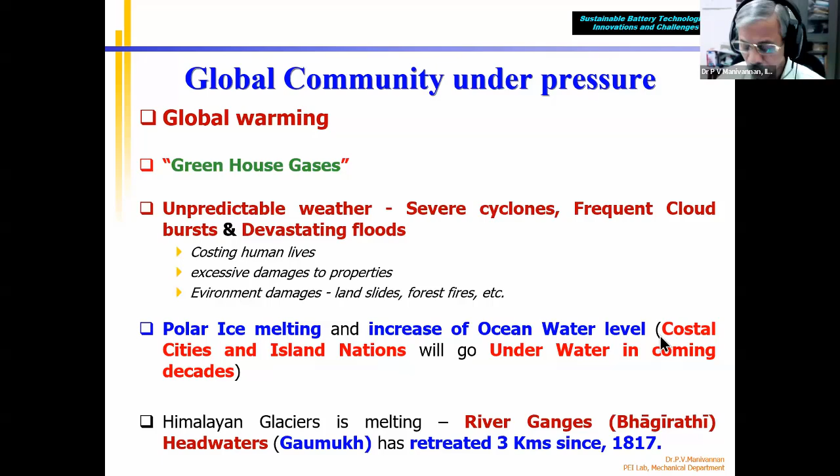That means many coastal cities like New York, Bombay, Chennai, Vizag, Calcutta, Tokyo, big cities around the world, will go under water, because IIT Madras is maybe 5 to 8 meters above sea level, with the Bay of Bengal just 1 to 1.5 kilometers away. So if the Bay of Bengal water level increases 10 or 20 meters because of melting of polar ice, Antarctica, Himalayan and Arctic glaciers, the overall water level will increase 10 to 20 meters. That means 60 feet also it can go. So many cities will go. That is also a danger. So all these things should be avoided.

So what do we have to do? We have to reduce the production of CO2, which is called a greenhouse gas. It is a dangerous gas, so it should not be produced. That means you should not burn fossil fuel at all. Petrol, diesel, kerosene, LPG gas, methane, wood, coal, nothing should be burned anywhere in the world. If you burn, you are adding more CO2. The global average temperature is presently 1.5 degrees. They say if you don't reduce fuel burning to zero within another 10 to 15 years, the temperature can go up to 2 or 2.2, then most of the ice will melt.

Then the problem I told will come. So that means we have to reduce the burning of fossil fuels, wood and coal. Where we are using, we know. We are using fossil fuels for heating and cooking inside the house.

India, no problem, tropical country, we don't need this heating. But if we go to Europe, USA, Canada, Japan, China, Russia, all European countries, or Australia, in winter the temperature goes even minus degrees for 2 to 3 months. The entire house should be heated, otherwise nobody can live inside there.

The human body requires 18 to 20 degrees to maintain properly. So at least 20, 22 degrees, not lesser. Otherwise you will get shivering, fever, all these things. So you have to maintain it.

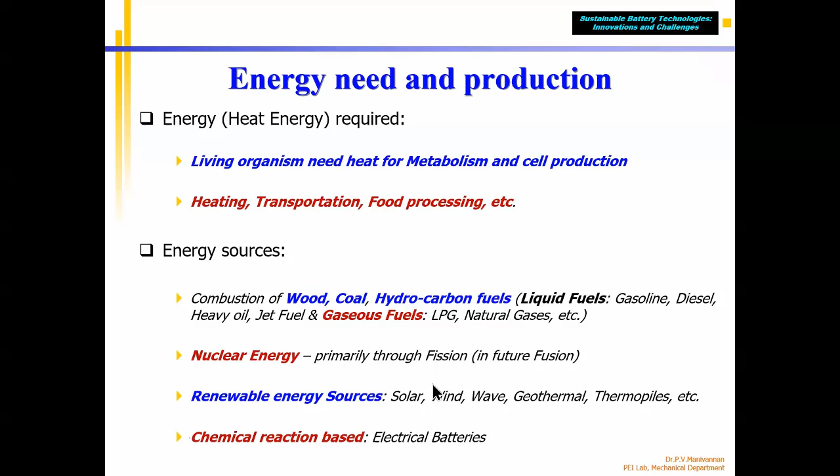Okay, now I am coming back to our topic, sustainable. Still, we need to go for sustainable battery. Before that, quickly let's go to sustainable energy technologies. First, what do you mean by sustainable? The word is a normal English word—sustaining, maintaining, or continuing. That is the meaning of sustaining. Okay, sustainable energy technologies.

What it means is a technology using which I can produce, for example, electricity today, tomorrow, day after, next month, next year, after 10 years, after 100 years, 1,000 years, hundreds of years. If I am able to produce electricity or energy from a particular source continuously, then that source is called a sustainable energy source. Okay, just 2 minutes before I told you, take the sun.

Suppose if I am producing electricity using a solar panel from the sun—the sun has been there for the last 5 billion years. I'm talking about billion meaning 5 into 10 power 9 years. Now astronomers and other scientists have found that the sun and earth, the solar system, was produced 5 billion years before.

Now the sun has consumed 50% of its fuel, which is hydrogen for fusion, and it is producing energy, sending heat and light to earth and all the planets. It is in mid-age now. If I think the sun will live for 100 years total, it has already lived for 50 years, including earth's existence—5 billion years before, that's what research calculations found. 5 billion years before, the solar system was formed; the sun is around 5 billion years old. It will live for another 5 billion years only, based on the amount of hydrogen available to sustain fusion and create heat and light supplied to earth.

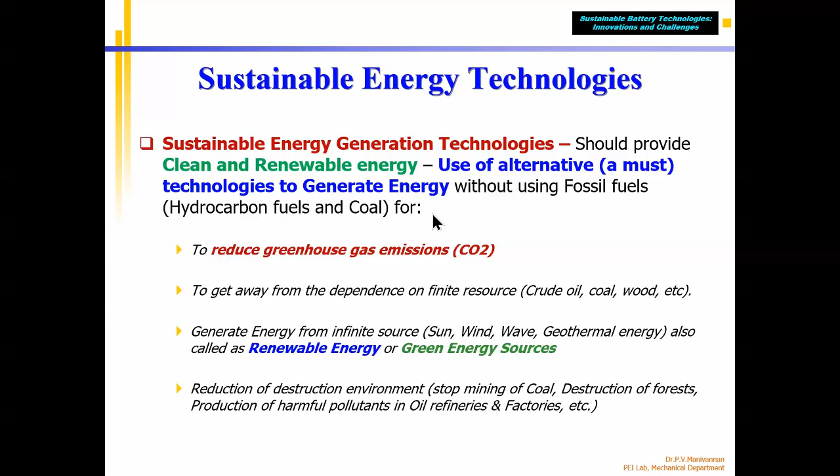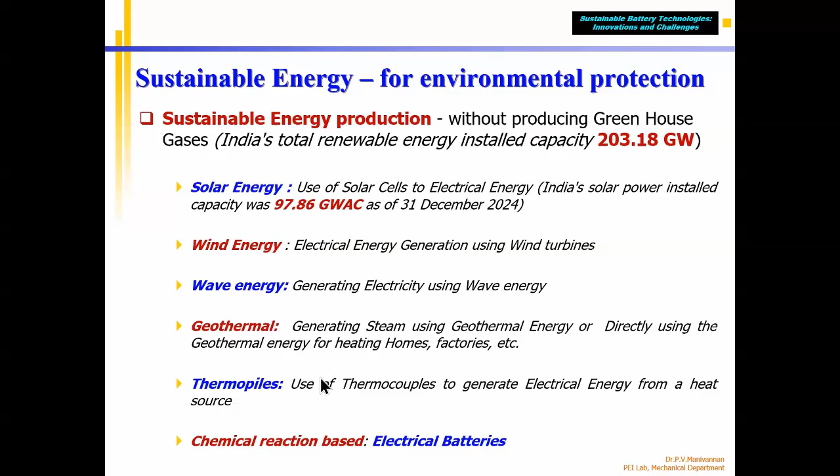If you do that, then we'll say we have invented something. Already these technologies are available, but their use is very limited compared to burning fossil fuel, due to various reasons. So again, sustainable energy sources, as I told you, include solar energy, wind energy, wave energy, geothermal - just forget thermopile for now - and of course batteries.

Now, till now we talked about the problem of burning fossil fuel. Why we need to look for sustainable or renewable energy sources, so that we can stop global warming, so that earth's environment is protected, so that humans, animals, all the plants survive. Otherwise, they say humans will destroy the earth itself within 100 years.

If we allow burning of fuel at the rate we're making cars, motorcycles - many times we think driving a motorcycle, car, or flying an aircraft burns fuel, but not only that, your computer is also consuming current. Billions of computers, billions of TVs, billions of cell phones, and you know your data is stored in the cloud by Google and all those things.

Cloud storage consumes a lot of energy - they have separate power stations. Google has a power station producing gigawatts of power per year, otherwise they cannot store your data. That means we are burning energy to run TVs, computers, data storage, internet, cell phones, all these things.

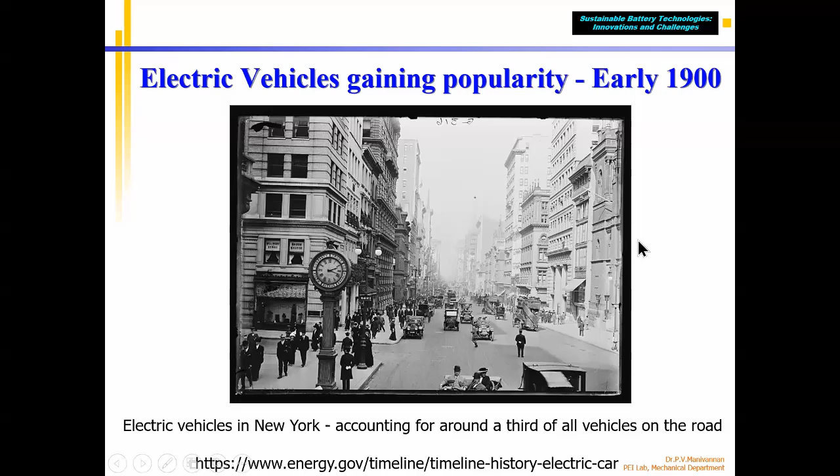So it was easy. So because of that, the lead acid battery was very poor in case of energy density, correct? Weight to energy density very poor. That's why it failed, it was replaced by petrol engine.

Right, so electric cars were not only roaming on the earth, in 1971 or 72, Apollo 14 or 15, correct? America sent astronauts, all of us know, correct? 1969, Armstrong, July, correct? I think July 20th, he landed on the moon surface along with Edwin Aldrin.

Two persons walked for a few minutes and collected this one. Everybody knows the first man to land on the moon is Neil Armstrong, followed by one more person, in the first mission, that is Apollo 11. In Apollo 12, again two people went. They walked on the moon.

Apollo 13 failed because it could not land. Then 14, 15, 16, 17, which was the last. So if I am correct, around 12 or 13 people walked on the moon surface. 12 people walked on the moon surface, all Americans, within a few years, 1968 to 72.

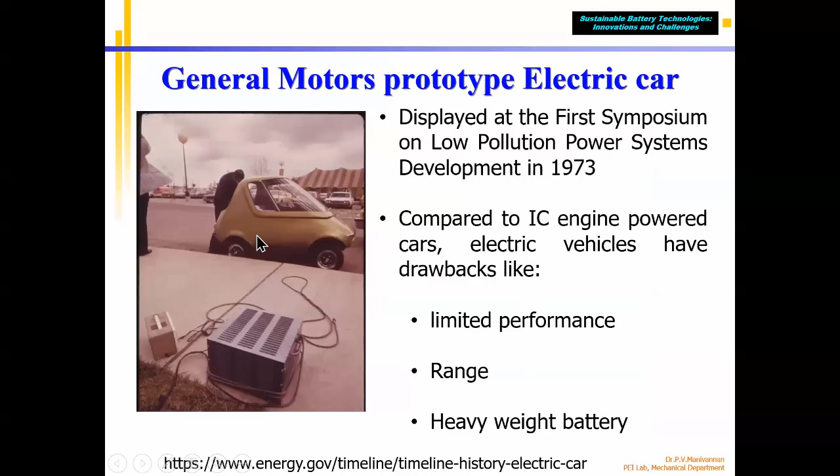So the electric car was started in 1973 by GM, and it was using a lead acid battery. It had a problem, so they stopped it. Due to that, we are using petrol engines. And again, I told you, production of CO2 should be reduced. But that would mean you should not use petrol or diesel fuel at all.

That means no transportation. Billions of cars, trucks, buses, ships, everything will come to a halt if I decided not to use petrol. Then how to do transportation of passengers and goods? The world will come to a standstill. So the only way is increasing the fuel efficiency of the engine. That is the first step.

This started in 1970 with the fuel injection system, which we call the port fuel injection system. Diesel engines use a common rail diesel injection system. If you see modern diesel cars, they don't make too much noise. Go to any car showroom, Toyota, Maruti or Mahindra, and take a particular model; they have two engines, petrol and diesel, in the same model.

If you use a diesel car, they're using common rail diesel injection, which makes an efficient engine with better combustion and less tailpipe products, like smoke, which we call particulate matter, and nitric oxide produced by combustion. That will be reduced using common rail injection. In the case of a petrol engine, they use port fuel injection, PFI or MPFI.

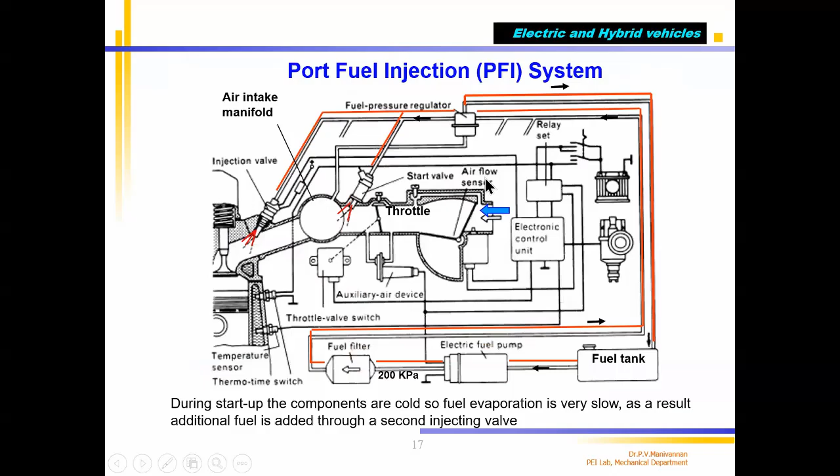That's why all the governments throughout the world are forcing car, motorcycle and truck companies to use one of these technologies, port fuel injection or common rail diesel, instead of old technology. Another thing is, as I told you, this is called the spark ignition petrol engine, in which air and fuel are mixed inside the combustion chamber, a spark is given, and the fuel burns and produces force which is converted to torque, and the vehicle moves.

Then the diesel engine, we call compression ignition. Air is sucked in, diesel is injected, it burns and produces a force that is converted to torque and drives the vehicle. The exhaust gas goes out. This is conventional, in which we use CRDI or MPFI technology. The third technology is called the HCCI engine, homogeneous charge compression ignition, which combines the advantages of the petrol engine and diesel engine and produces power with less NOx production. But it is still in the experimental state.

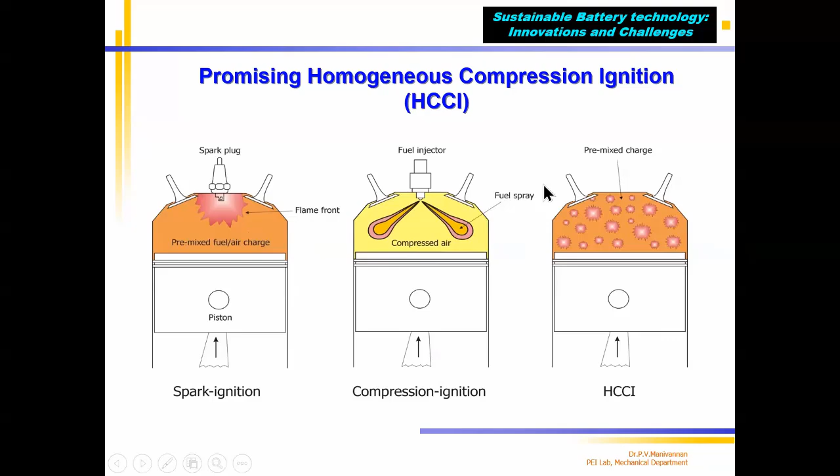So what I want to say is, using newer fuel injection technologies like MPFI, CRDI or HCCI, all car companies around the world are trying to reduce fuel consumption so that CO2 production and global warming are reduced and a sustainable environment is created. But we have to eliminate all these engines and go to electric vehicles instead. So ICE engines, sorry, we want to eliminate, but ICE still has a lot of advantages as of today.

It is a proven technology for the last 120 years. Engines with varying size, power and speed are available, starting with a 50cc motorcycle up to a ship engine of 1 lakh HP. I'm not talking about 100 HP or 1000 HP, 1 lakh HP, driving ocean liners, crude oil tankers or aircraft carriers. Such varying sizes are not available in electric motors. That big is not available nowadays. That big batteries are not available.

You cannot run an ocean ship or a crude oil tanker of 1 lakh HP using an electric motor. Batteries are not available. It is only possible with an IC engine, specifically a diesel engine. Even petrol engines they don't use. In IC engine technology, the input energy is hydrocarbon fuels like gasoline. The extraction of petrol and diesel from crude, storage, transportation, handling and safety are proven, easy and highly matured over the last 150 years. And the IC engine has reached close to the theoretical thermal efficiency. Because of all these advantages, we cannot get rid of it, because we need transportation.

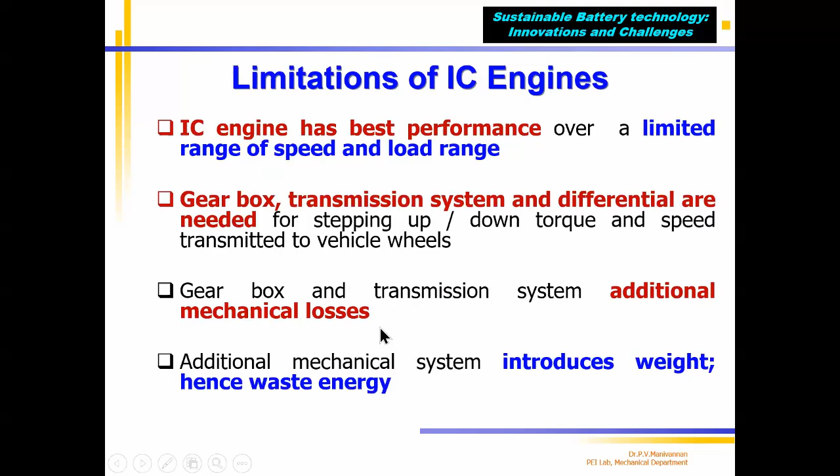But an IC engine cannot produce that. I will show it in the subsequent slide. So it provides adequate torque over the possible range. An electric motor produces full torque from 0 speed to almost maximum speed. They are efficient, 95%. Control is easier compared to controlling an IC engine. We saw IC engine control: you need electronic control, sensors, lots of things.

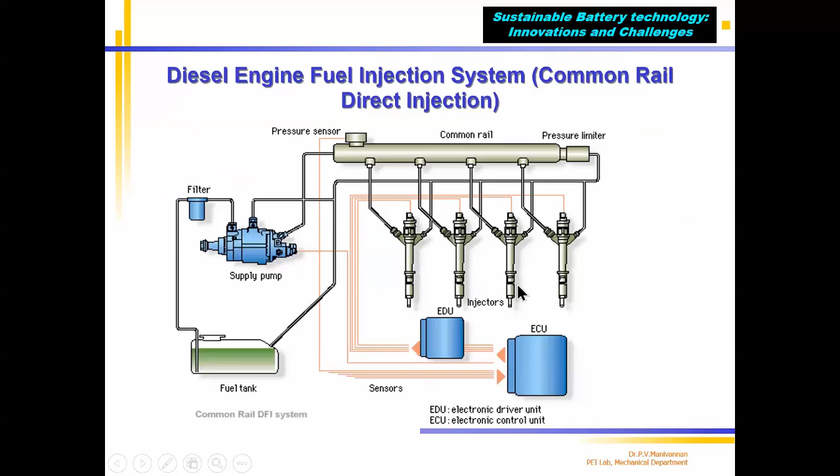Correct, petrol and diesel engines. Because of the cost, CRDI or MPFI engines are very expensive. Compared to that, an electric motor can be easily controlled using an electronic control circuit. So it offers a better solution. Okay, but electric vehicles also have limitations. What are the limitations? Energy sources. The vehicles with electric motors are moving.

It is not stationary. You cannot connect it using a wire to your electrical source, the plug points on your wall. You cannot connect a wire because the vehicles are moving from one place to another. You cannot have long wires. That means the only way of storing energy is a battery. But battery technology has a limitation. For the last 100, 150 years, we have been using lead acid batteries in automobiles.

For the last 20, 25 years, we have started working on lithium-ion batteries. Still, there are a lot of issues that have to be solved, and we are trying to go to new types of batteries also. So the battery is the main limitation, because how much energy is stored in the battery decides how long the vehicle will drive. Battery energy density by weight is very low compared to petrol. Hence, the range of the electric vehicle is limited.

Now, slowly, we are improving. Recharging a battery takes a long time. For example, take a lead acid battery, a 12-volt battery with 30 amps, which I use in my two-wheeler. A small electric two-wheeler using it may go 30, 40, 50 kilometers. After that, to charge the battery fully, it may take 5 to 6 hours. That means you cannot use your vehicle for 5 to 6 hours. That is one of the major drawbacks of this lead acid battery.

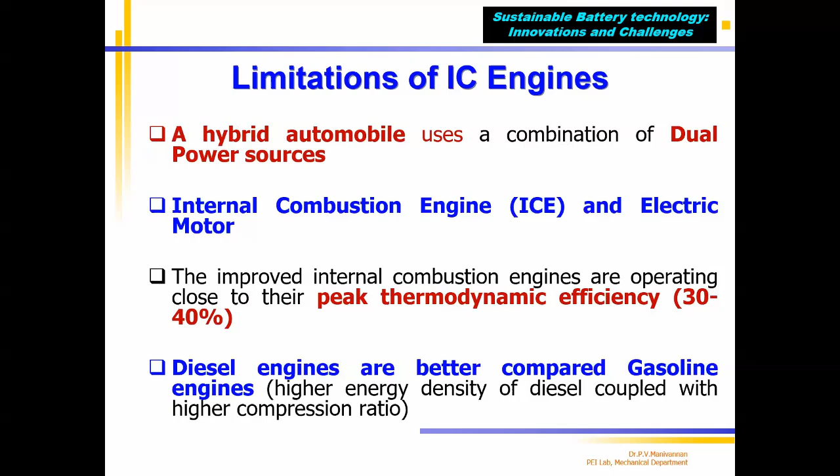As I told you, IC engine also has a limitation, so we want to get rid of it. But suddenly you cannot leave it. You cannot go with the electric vehicle either, because electric vehicle also has a limitation.

Once the vehicle starts moving, you go to second gear, third gear, fourth gear, so that at the top gear, engine speed will be same as the wheel speed, or propeller shaft speed. Because of that, you are adding another additional mechanical arrangement.

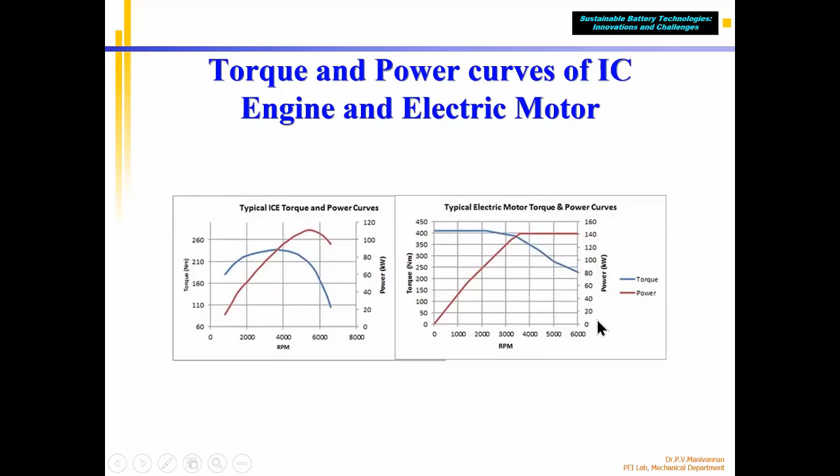So if I combine both, then I get what you call a hybrid vehicle. That is the optimal solution. Hybrid vehicle uses both electric motor and IC engine together, so you get both benefits - wider operating range, and wherever a petrol station is available, you can fill up. So the hybrid vehicle can drive with the engine as long as petrol is available. If petrol is not there, you can drive with the motor, or combine both also.

So that means you get less pollution and can operate longer. If the battery is discharged, you go to the nearest petrol bunk, drive your vehicle with the IC engine, fill the tank, and drive while the engine is running - it can charge the battery so that later you can use electric. So these are the advantages of combining both.

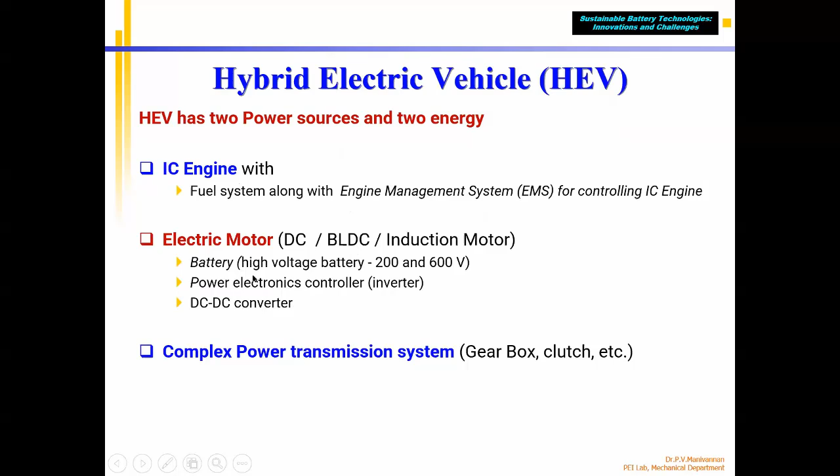So there are different types of hybrid vehicles, combining IC engine with electric motors, so that you get the advantage of both. Using hybrid vehicle is going towards a cleaner and greener world.

This was our topic - we are talking about going greener in this one. That means we are going to use less fuel, because in a hybrid vehicle, you can have a bigger motor and bigger battery, and for emergency purposes alone, a smaller engine. That engine can be used for charging the battery or driving the vehicle, and different combinations are possible. That means you are going to use less fuel, and most of the time you are going to drive your vehicle using battery.

Battery will not produce CO2. The only thing is, the battery charging should be done using electrical power generated by wind energy, solar energy, or some other renewable source, not by thermal energy. If you do that, you can reduce emissions.

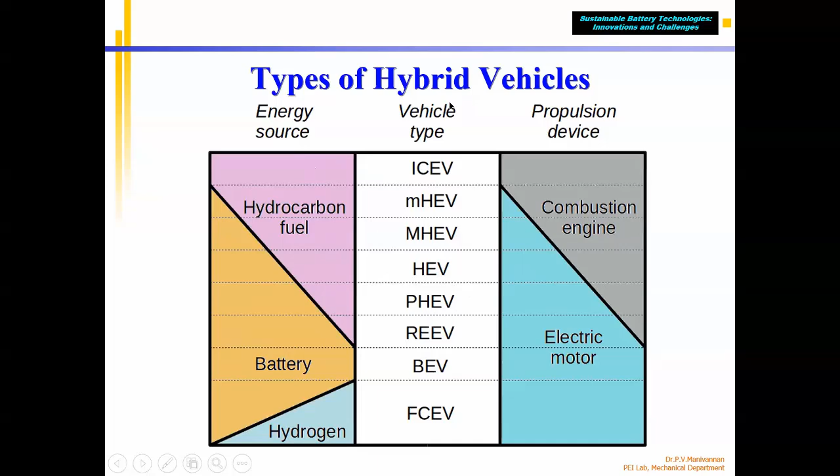So there are different hybrid vehicles. Hybrid vehicles start with pure IC engine, mild hybrid, medium hybrid, hybrid, up to pure plug-in hybrid - there are different varieties. This graph shows that I can have a pure electric vehicle, and this is pure engine based. By combining these two in different proportions, I can have different types of hybrid vehicles. It's possible, but we don't have time to talk about all these things.

I have already explained this, by combining these I'll show you the types of hybrid vehicle: series hybrid, parallel hybrid, series-parallel, plug-in hybrid, and what else.

In a hybrid vehicle, you have two power sources: an electric motor and an IC engine. This is called parallel hybrid. The electric motor and engine are connected to a gear on a common shaft, which in turn is connected to the wheels. So when the engine runs, the vehicle will move. When the motor runs, the vehicle will move and the engine may be off. Or I can drive both the motor and engine together. This is called parallel hybrid, since it uses engine power directly.

This is called series hybrid. In series hybrid, you have the engine, which drives an electrical generator. That electrical power is converted to DC voltage and given to a DC electric motor, but the electric motor alone drives the vehicle. Please note that in series hybrid, the electric motor always drives. The engine is used only for generating electrical power, which is used for driving the motor and also to charge the battery. This is called series hybrid.

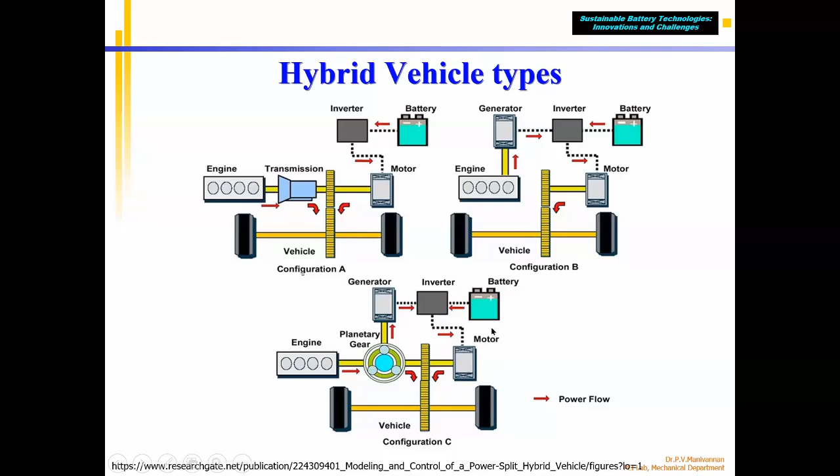This next type combines both: engine and motor, but they are not directly connected to each other. The engine is connected to a planetary gearbox. Using this, the engine power can be given to the wheel, or can drive the generator to produce electricity and charge the battery, which in turn runs the motor. So these are the very popular types of hybrid vehicles.

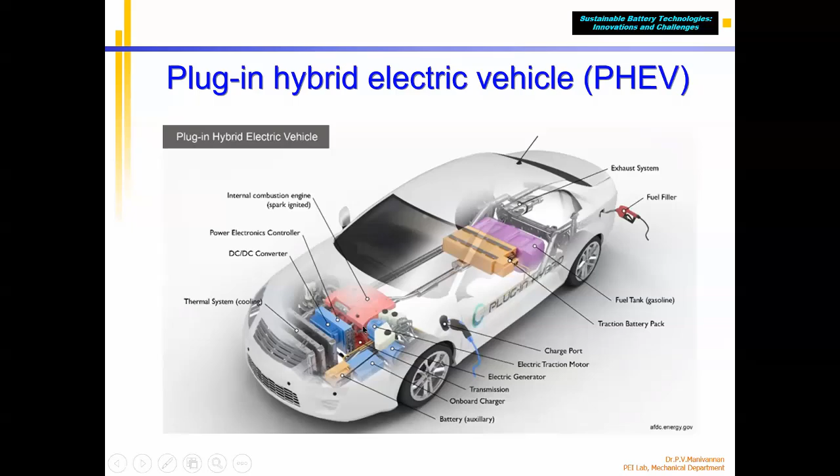The third type is called plug-in hybrid. Here you have an electric motor and a small engine, and the engine is used for charging the battery. But you mainly charge the main battery pack at home from a wall mount plug. It also has a small engine, often a gasoline or petrol engine, that is used to charge the battery. If the battery dies in the middle of the way, the engine will run and charge the battery so you can continue driving. This is called a plug-in hybrid vehicle, and it has the advantages of both types of vehicles.

I have talked about what I wanted to talk about. So this arrangement, you can get more knowledge about it if you want. What is the time? How many minutes do I have?

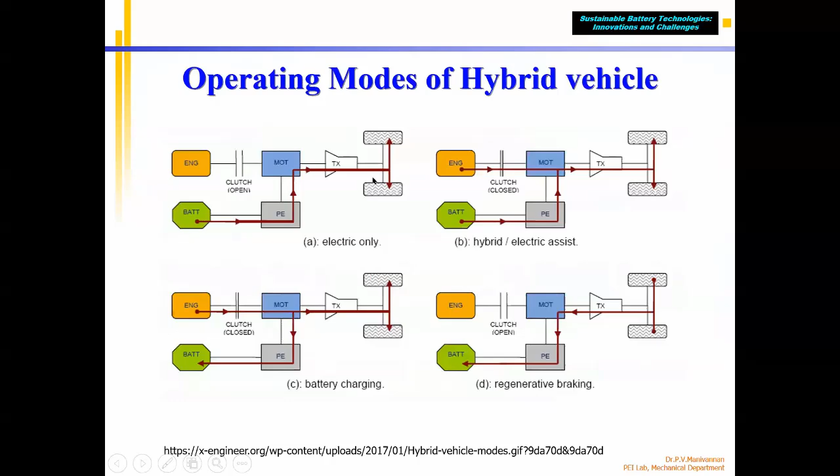So using a hybrid vehicle is better, as I can reduce carbon dioxide production. But the best option is to go for a pure electric vehicle, meaning no IC engine at all. In that case, I need to use batteries. If I use a pure electric vehicle powered from the battery, and that battery is charged from renewable energy like solar, wind, or geothermal energy, then we can achieve a sustainable battery and go for greener and cleaner energy.

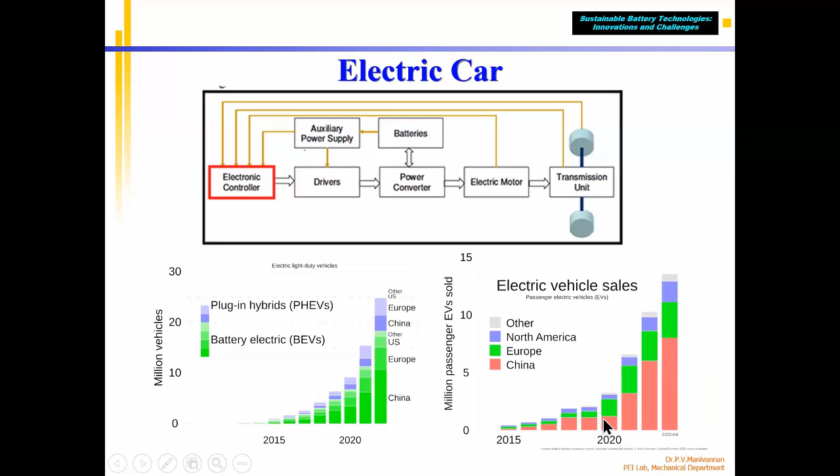Sustainable battery means you need to produce a battery that doesn't use harmful material, for environmental sustainability. The battery's major problem is environmental damage. The lead acid battery has a drawback because it takes a longer time to charge, and it has a lower energy density relative to weight. For example, the battery weighs around 20 kg, but only 2% of that weight is the electrolyte, which is converted into electric energy. So the weight-to-energy density is very bad in a lead acid battery.

That's why they invented lithium ion batteries, which they call LIB batteries.

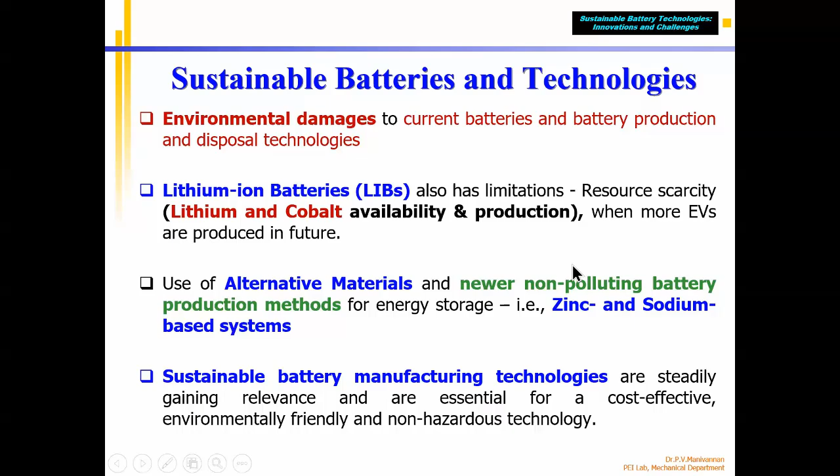Lithium-ion batteries have a higher voltage and can work on higher voltage compared to lead acid batteries, but they still use CRM materials, harmful materials like cobalt. Lithium itself is toxic, and after battery life is over, these get dumped and pollute the environment. So use of non-polluting material to make the battery is called a sustainable battery. That means lead acid battery and lithium-ion battery, which are currently available, are both not sustainable batteries, since they use harmful material to make the battery itself.

In a lead-acid battery, the anode is the positive electrode using lead oxide, PbO2. The negative electrode uses porous lead, Pb, and the electrolyte solution is diluted sulfuric acid, which is sulfuric acid plus water. When it's connected to a load, current starts flowing, meaning electrons flow, and that's how the battery produces power. So the battery has three parts: electrolyte, negative electrode, and positive electrode made of this material. The electrical energy is produced by a chemical reaction called the redox process, which is reduction and oxidation.

When you connect an external load, they call it discharging. At the positive electrode, what happens is the H2SO4, sulfuric acid, splits into hydrogen ions and sulfate ions. The hydrogen ion reaches the PbO2 plate, receives an electron from it, and becomes a hydrogen atom. This hydrogen atom then joins with PbO2, which is the positive electrode.

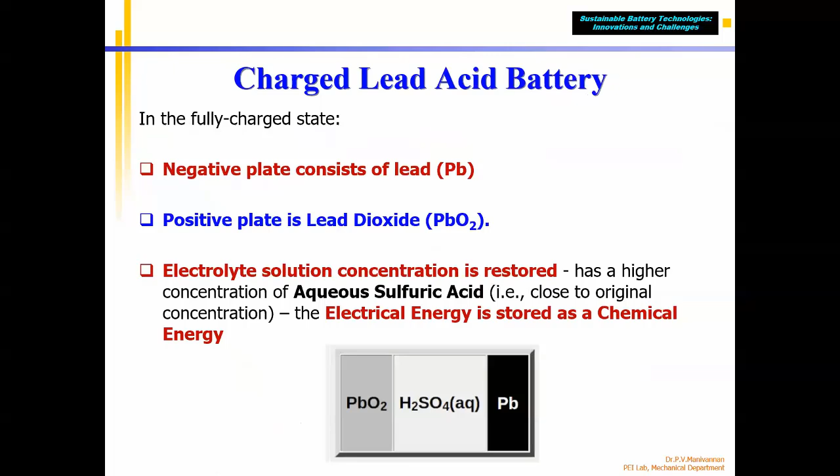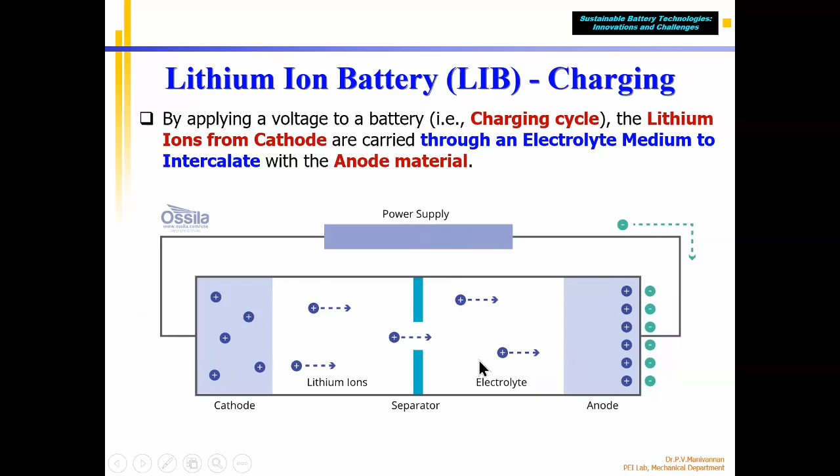So if the battery is discharged, you have to charge it again by connecting external power. This is the charging cycle; the opposite happens in the discharge cycle. From anode, the lithium ion moves to cathode, and at that time electrons move in the external circuit. So in both charging and discharging, the ions move inside the battery in the electrolyte from anode to cathode or cathode to anode, while the electrons move in the external circuit. This is the beauty of this system.

The only problem is it uses cobalt, nickel, and lithium. These items are harmful material. Still, lithium-ion batteries are better than lead-acid batteries. They have higher energy density.

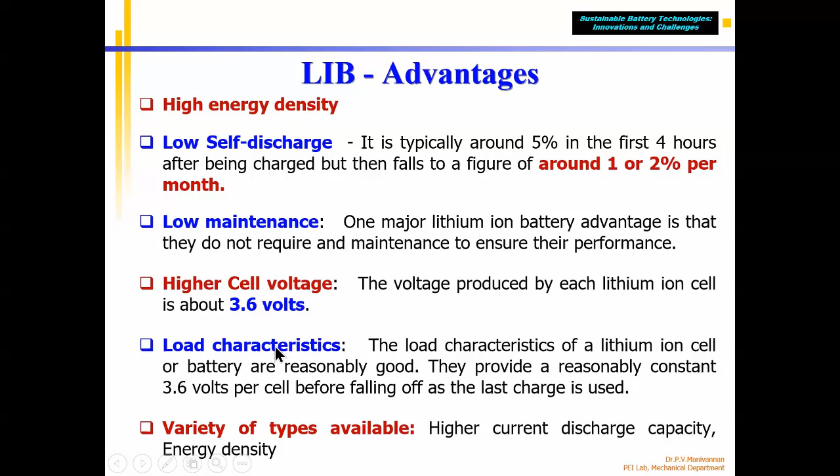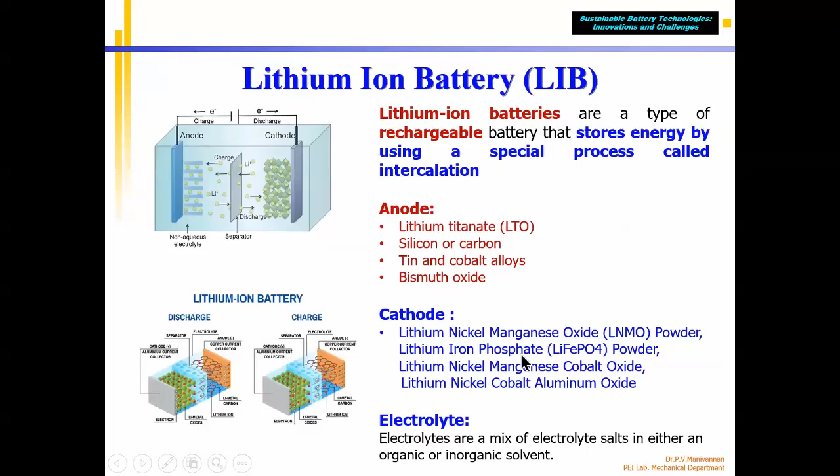The advantages of lithium-ion battery are higher energy density, low self-discharge, low maintenance, and higher cell voltage. Per cell it produces 3.6 volts, while lead-acid battery produces only 2 volts. It has better load characteristics, can maintain constant voltage for a longer duration, and a variety of types are available, like lithium iron phosphate and others.

What is the disadvantage? It requires a special battery management circuit to control voltage, current, and discharge rate. Apart from that, it needs a cooling system. Bigger lithium-ion batteries need an additional cooling system. These are the major drawbacks. It also uses harmful material, so even though it has higher energy density and is better than lead-acid battery, it still has harmful effects from using cobalt and nickel.

So the next thing is to go for a sustainable battery. I'll just take another five minutes, sorry for taking a little more time, but I wanted to complete this. Sustainable batteries are new battery technologies people are developing, making efficient batteries and using recycling. Using the discarded battery material again is called sustainable energy or sustainable battery technology.

Producing electrodes for the lithium-ion battery generally uses certain solvents. These solvents are harmful, not just cobalt, nickel, and lithium-ion being drawbacks. These solvents are also dangerous and toxic, so this is a major problem.

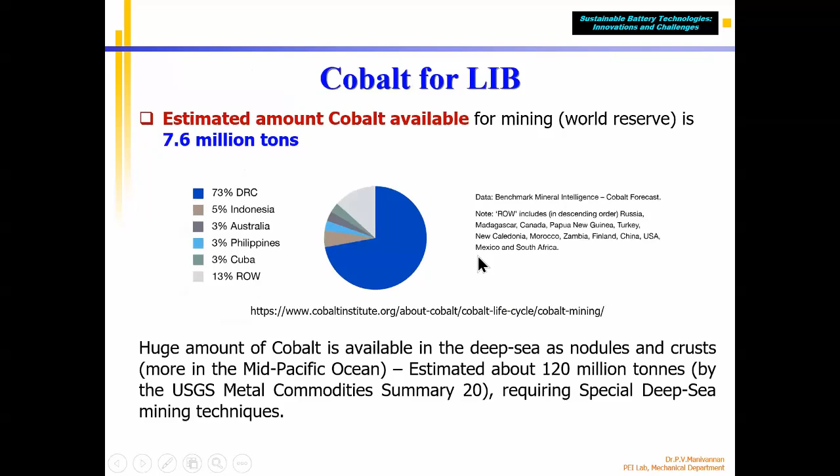So if we can get rid of this material and the cobalt and nickel in the lithium-ion battery, we can produce a sustainable battery that can charge and discharge more cycles without producing harmful material when finally destroyed after use. So now people are coming to new types of batteries.

The new type is called zinc-ion battery, in which the anode is made of zinc material and the cathode is made of manganese-based material. Please note they are not using nickel or cobalt. Zinc may be a little toxic, but not as dangerous as cobalt, lithium, or nickel, which are a larger concern. So the cathode material and electrolyte also don't use the harmful material used in lithium batteries.

Here too, the flow of current is due to the flow of ions, similar to lithium, same technology, same working principle, but the anode and cathode materials don't use toxic material. So zinc-ion battery is the new sustainable technology, meaning it doesn't use what is called CRM material, or critical raw material.

Another word you can note down is critical raw material, used in lithium-ion battery: cobalt, nickel, lithium. These three materials and the solvents used are mainly called CRM materials, critical raw materials. They have very limited availability, not available everywhere. Maximum cobalt and lithium is available in China, US, and some African countries. Cobalt is mainly from Congo, which produces around 70% of cobalt used in lithium-ion batteries. It is a dangerous condition, they are using child labor, all these things. That is the problem.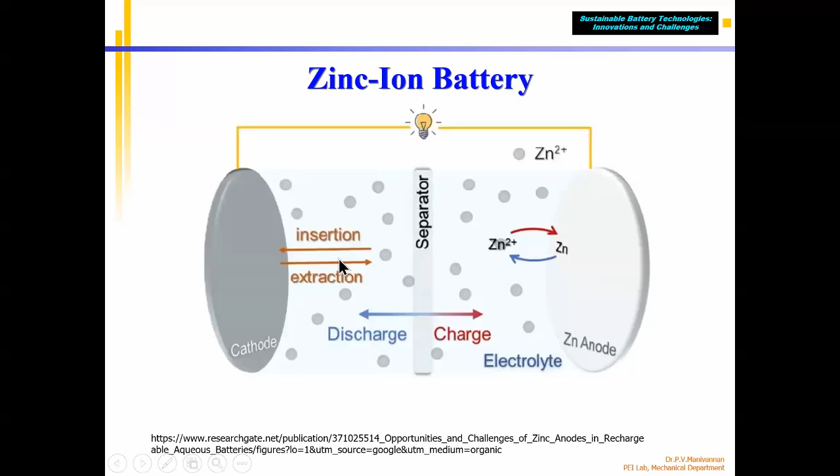So that means if I use lithium-ion battery, these are harmful effects. If I use zinc battery, I am not going to use these CRM materials, critical raw material, which are available in limited amounts. Zinc is available widely in many countries, so you can use it similarly. The principle of working is the same, ion exchange, all those things. Zinc is easily available material, environmental impact is very limited, it's less toxic, not harmful, and compared to lithium, cobalt, nickel, it's safer operation.

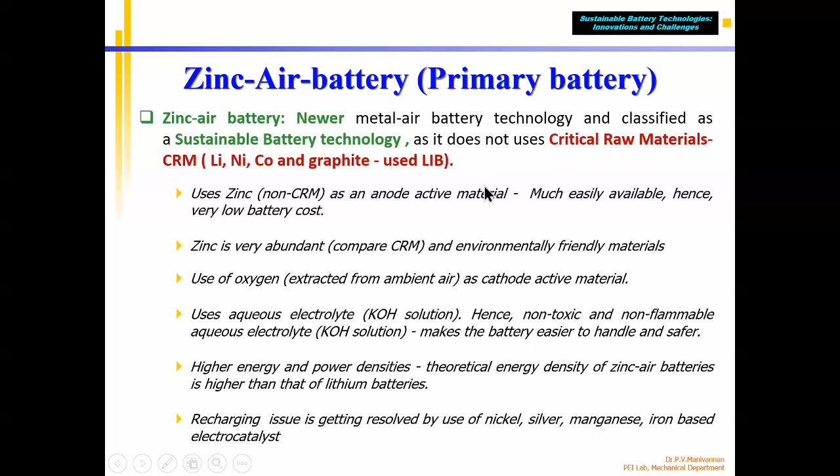Another one is zinc air battery, another technology. It also doesn't use raw materials like lithium, cobalt, all those things, so because of that this is also a sustainable battery. Zinc air battery, how it works: it takes air, oxygen from the air. One electrode is called the gas electrode, the anode is zinc material, cathode is a gas electrode in which oxygen is used as electrode. That's why it's called zinc air battery. It doesn't use these CRM materials, but uses the same principle.

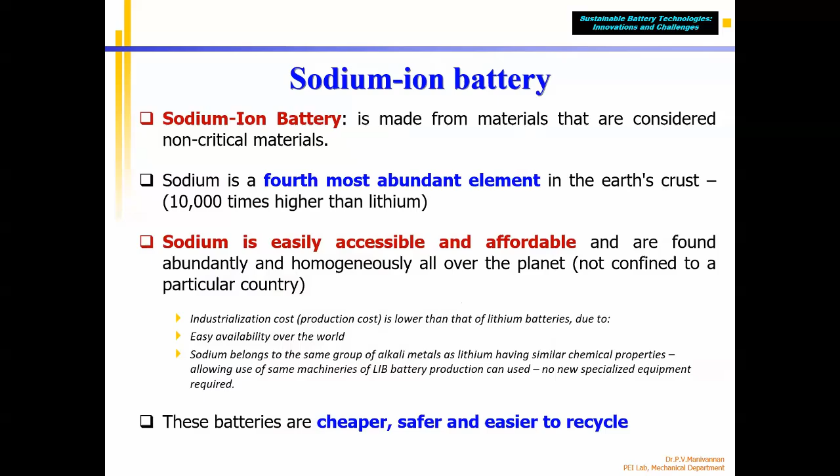So this is better. Then sodium ion battery is also now getting popular. This battery also uses sodium ion. Sodium is available easily worldwide, and it is similar technology to lithium ion, also using intercalating ion. No electron movement inside the electrolyte and inside the battery, electrons are moved only in the outside circuit. Cell construction and working are all the same as lithium ion, only thing is it is using sodium and other materials for anode and cathode. Because of that, it is not using CRM material, so it is a sustainable battery.

The advantage: anode is made of hard carbon, graphene or carbon. Cathode is made of oxides of iron and manganese. These items are easily available, they are not CRM material, not toxic like lithium-based ones. Electrolyte use is also mentioned. The main advantage is they are very cheap. Lithium is very expensive, but sodium per ton used in battery is only $2,000, while lithium is around $17,000. Apart from that, lithium uses toxic materials. So if I use SIB battery, they are eco-friendly or sustainable technology.

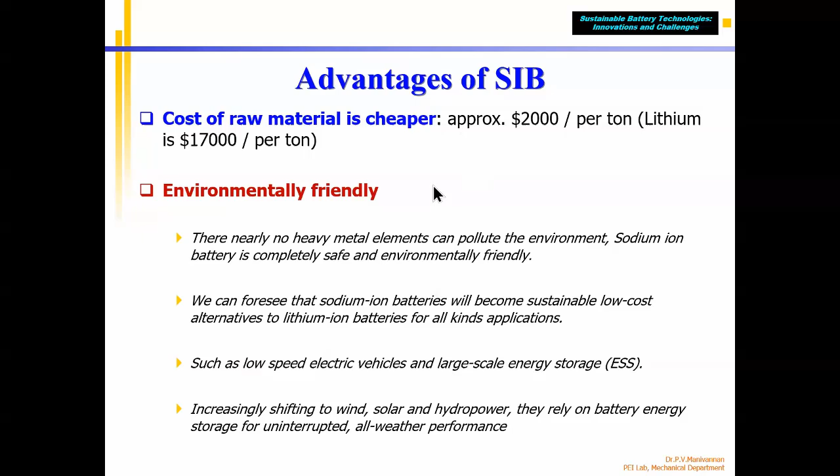See, some material you cannot touch, even with bare hand you cannot touch. Many materials, but these batteries can be easily handled. Yeah, that way it can be easy. But as I told you, the technology is yet to go for large scale industrial production. Only few companies are producing sodium-ion battery. That also is not fully commercialized, and they have limitations.

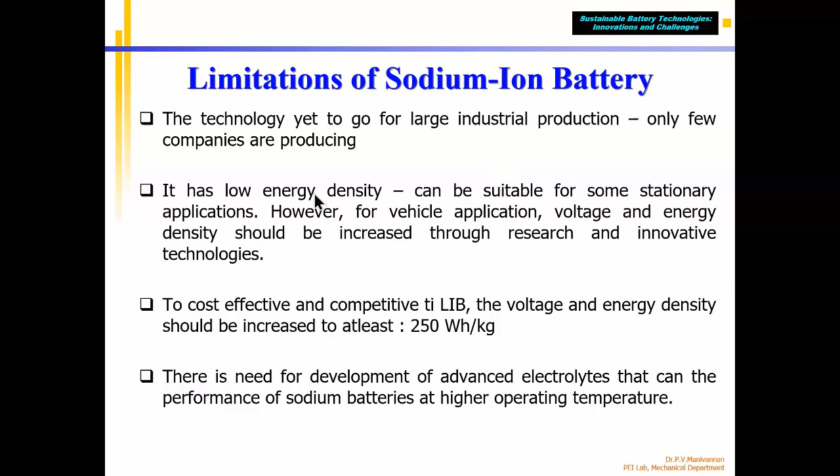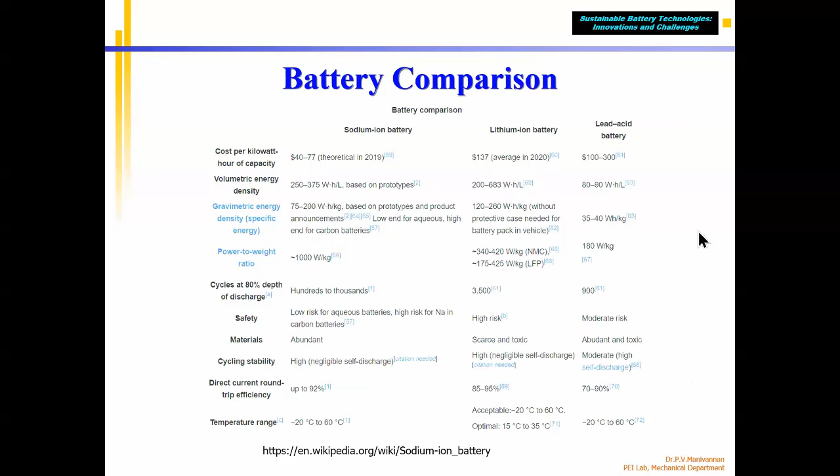It has a low energy density. That's why they're not able to sell. Compared to lithium-ion battery, the energy density is very less. If you see here, energy density will be very less. Correct? Because of that, the weight ratio, all those things, when you see comparatively, it is very less. Anything?

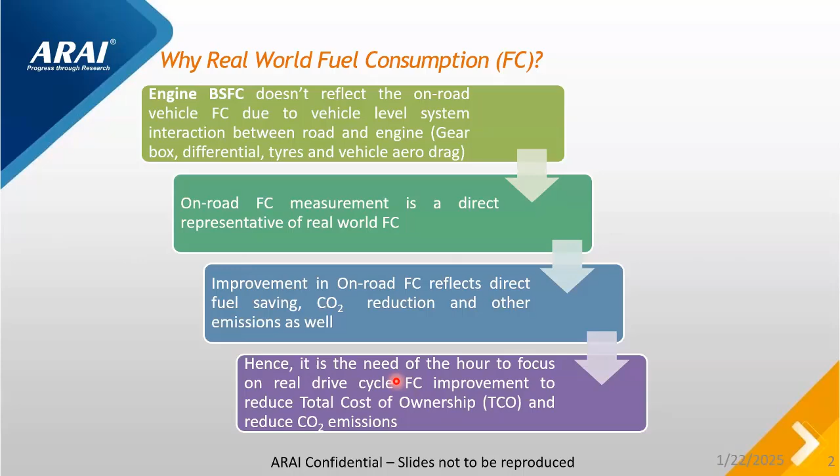We do not have any methodology today in India. We don't have any methodology for the real drive fuel efficiency calculations, which are going to give the realistic measurement. So that is the basic bottleneck or gap which is there in India. But is it possible to test it? Is there any solution to test? There is no methodology available for India, especially.

And Europe has developed their own methodology. They took 12 years to develop. Japan has developed their own methodology. They took sufficient time to develop. But when it comes to India, there is no methodology. But that methodology, what we are going to do, also should be agreed by all the OEMs.

Because my work, what I am doing here, should be acceptable. I cannot do the academic type of work. That should be acceptable to the many stakeholders. Then only my work will have some validity or consideration.

In this case, if you take a commercial vehicle of greater than 3.5 ton up to 55 ton vehicles, can I develop or can I test that vehicle on the road? It is quite impossible. So that's why there is an approach called the simulation approach. And this simulation approach is giving many benefits. For example, building a proto vehicle for physical testing can be avoided because it's very expensive. It's cost effective, quickly provides the solution, and you can do parameter sensitivity analysis.

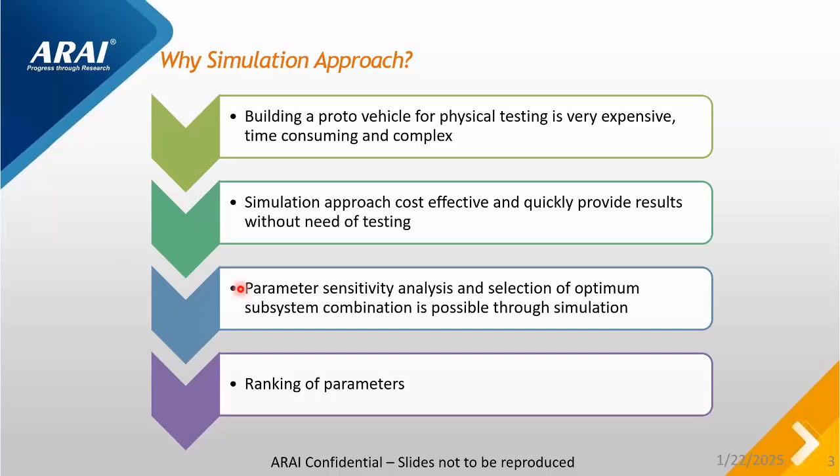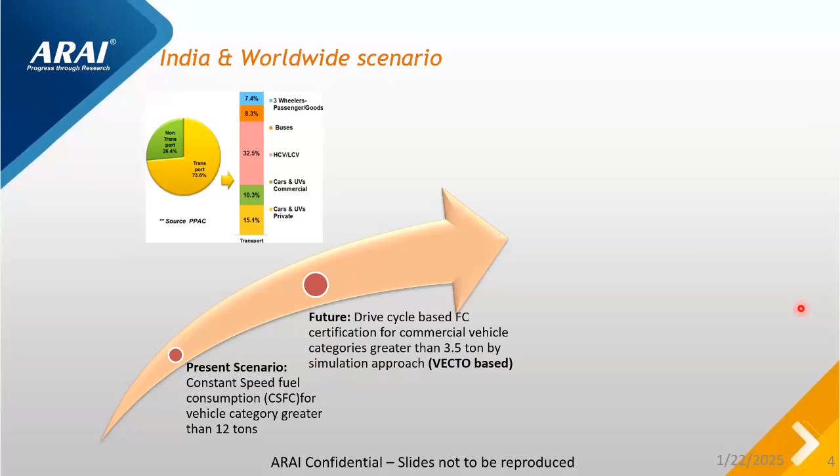If we see across the world, everybody adopted this approach except India. So India also, hopefully in a couple of years to 4 years time span, it will be adopted most probably. We are trying for that.

What are the key benefits? The benefit is that we can estimate exactly how much CO2 emissions this is producing, and also support the global warming policies as well as the Paris Agreement policies. And the procedure is that it will help to reduce CO2 emissions by setting up the targets based on the actual predictions of any vehicle category.

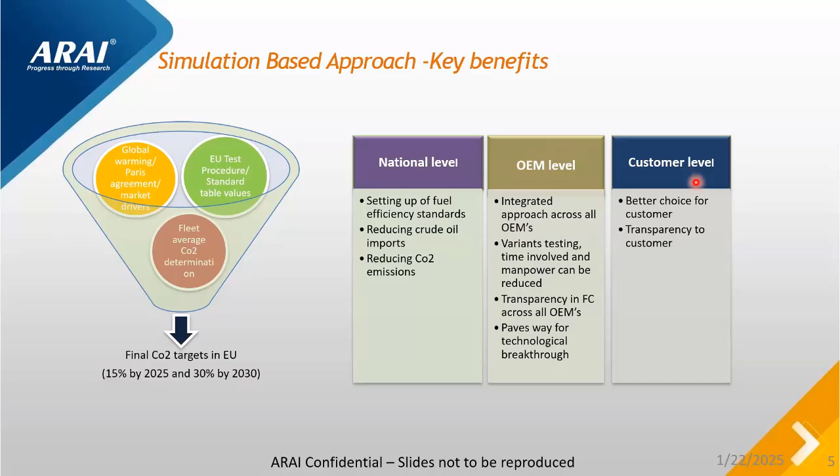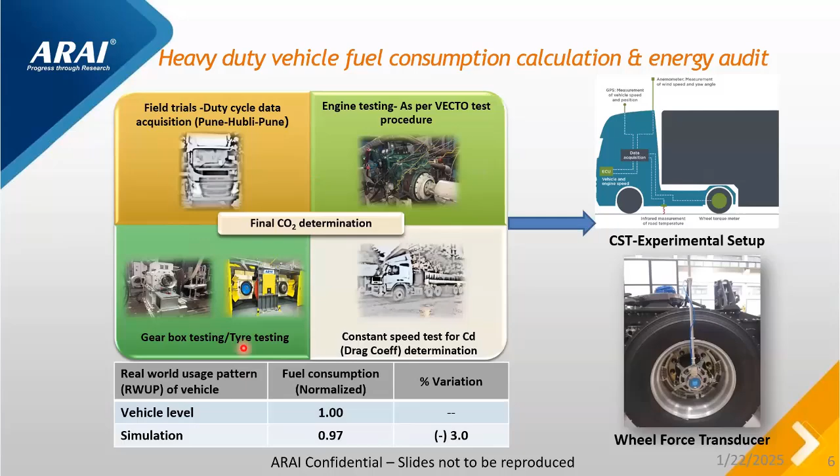So these are the conditions. We can also achieve the national level. It will also help the manufacturers, and it will also help the customer to select his interested vehicle or his interested model. So this is one small example of what we have tried out, and this is validated within 3%, which is acceptable. The work is in progress. Okay.

Before going to this type of activity, we need to analyze how much energy is distributed. Hopefully you will be able to see how much energy is lost at engine level, how much energy loss at vehicle level, drag, gearbox, differential, and other areas. Once we understand these locations, it will be easy for us to identify.

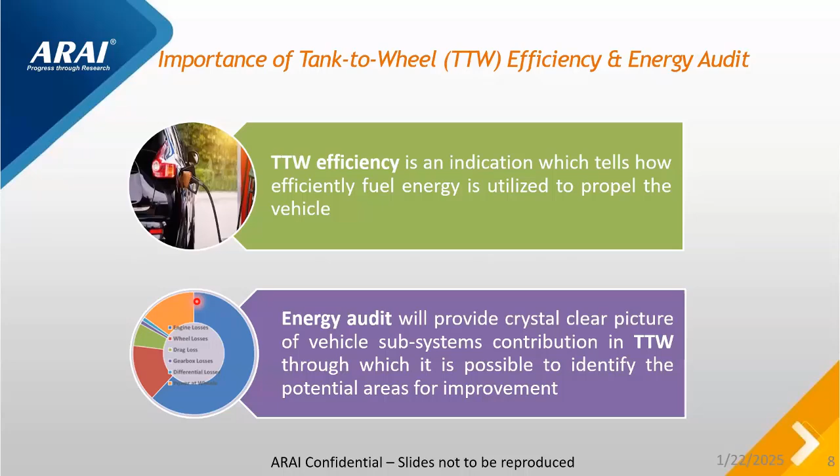So here, this particular approach, we are not limiting to only commercial diesel engines or gasoline engines. This concept is applicable across any vehicle category. Let it be EV, let it be fuel cell or hydrogen. So it's going to be applicable. The concept remains the same. Only we have to do the application research. So that overview I'm just giving you over here.

Any vehicle will have these different types of losses. When we are giving 100% energy, the tank to wheel efficiency is going to come down to 15 to 16%, or maybe sometimes up to 20 also. In electrical vehicles, it may go up to 23 to 25%. That means almost 75 to 85% energy loss is in these areas.

If we can try to improve 1% in all these zones, that will be a great benefit to the society. At the same time, the end user will get benefited. So this is the kind of program we are doing, and it's a new approach and new program to find out the different ways to improve the fuel efficiency by studying the different vehicles, different parts, different subsystems' losses and their efficiency improvement.

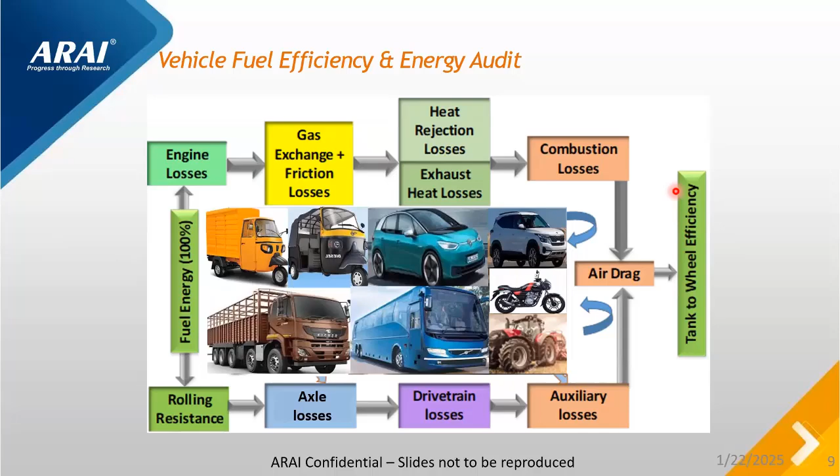So in this process, we can approach like this. Why I have given this presentation, there is an interest and logic behind that. Since you are all faculty members, this kind of approach may be helpful to you to do some more research in this area. That is the main thought process to select this particular topic. It may be a very short and small topic, but an interesting topic.

You can see the different vehicles, which vehicle is giving better efficiency, which vehicle is having more potential. We can do this benchmark, and this is an important task. We have to study based on the real world usage pattern, that is RWUP. This real world usage pattern needs to be generated, not for every vehicle, but depending on application. Now we are developing this particular map for entire vehicles in India.

The second is aerodynamics testing and simulation. For testing the aerodynamics, you have to build the vehicle, and that built vehicle has to be tested in the field to measure the aerodynamic drag. It's a very expensive process, and a simulation approach needs to be established.

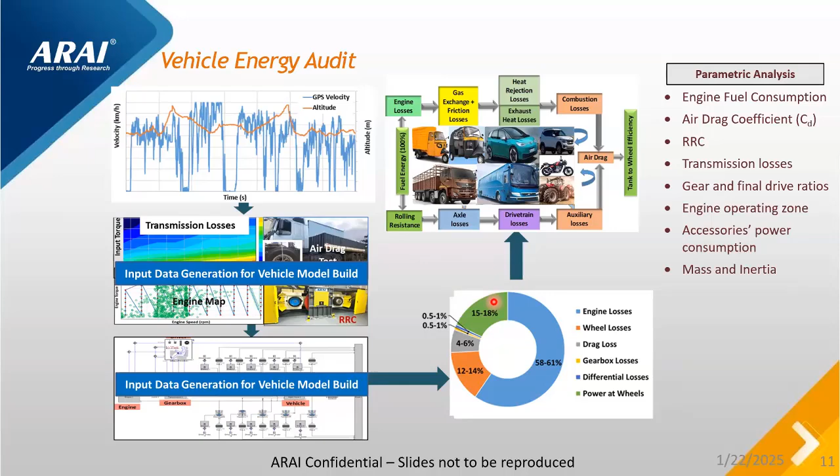These are all the vehicles possible to carry out, and we are working on this very aggressively with the entire system. We have generated a system, and we have some consortium formed for this, along with OEMs, ministry, and so many other stakeholders.

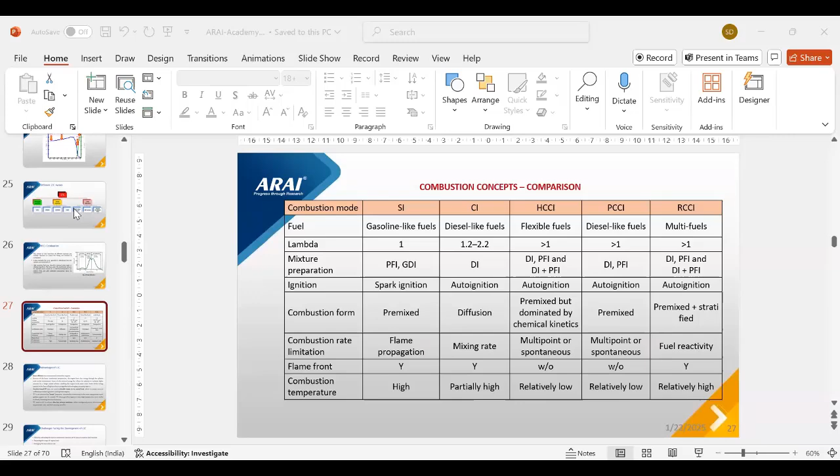Yes, so I will start from this slide here. There is some change in the number of years, a small change in the years, but otherwise the objectives are more or less the same.

You can see here, particularly focusing on CO2 emissions and GHG. Years are going to change, but obviously we have to reduce this. This is possible only through fuel efficiency. So one program I am going to show today is how we can improve fuel efficiency at the engine level. That is the program I want to show.

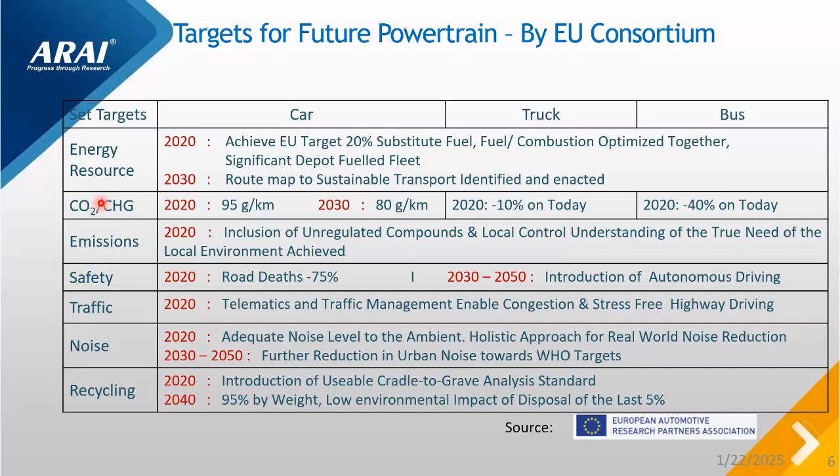Considering all these demands, I have to meet emissions compliance, efficiency improvement, and my system should be accommodative for different fuels. You know that the flex fuel concept is in discussion today. You might be aware of the flex fuel concept. Dual fuel concept is already there, but people are going for the flex fuel concept. But for all these things, there is a limitation in terms of time, manpower, resources, and cost.

So for any program, we have to see from all these angles: one is legislative requirements, second is compliance, third is what I have to develop. So we struggle between all these parameters before going to any new activity. So this is the one activity we have taken up.

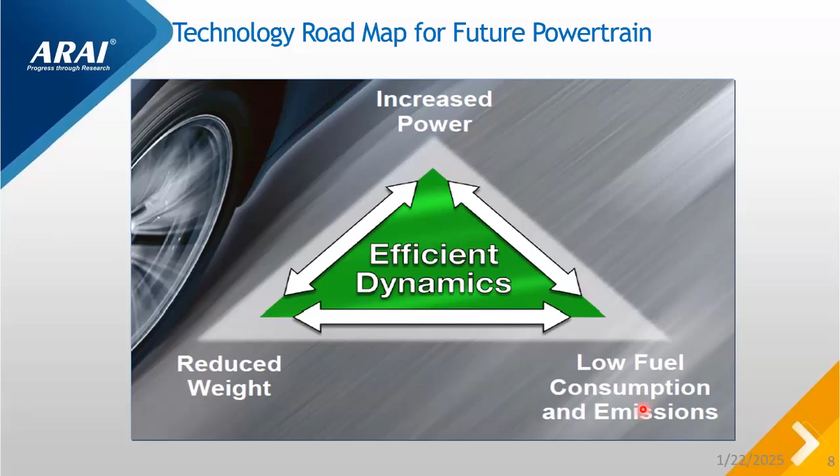So in this, there are different losses. Most of the professors might be aware about what are the different losses. So these losses, we try to tap in this program.

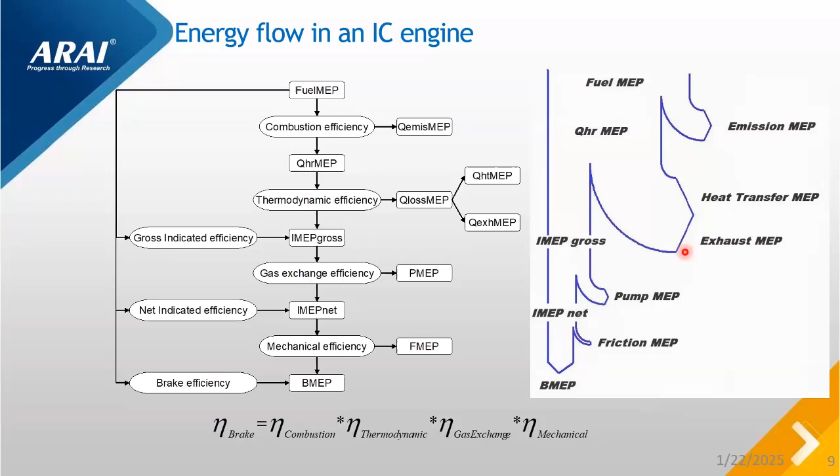So, how many of you believe that diesel engines are going to be there for a long time? Do you think that today, in the present scenario, EVs are going to replace diesel engines? Any idea? Just a question to you all. Any idea or any guess on that?

As far as I am concerned, my experience or my analysis point of view is that diesel engines are not going to die. It will be there, at least for everyone in this particular session, till our last breath - diesel engines, definitely, it will be there. That is the first note.

The second is that replacing diesel engines with battery is going to take a very long time because of its own limitations for this particular category.

Third point is that if we are planning to replace diesel engines with fuel cell EVs, again there is a technology limitation, technology readiness, technology maturity, and at the end, the overall cost of the system. While selecting all these parameters, emissions at the source - whether high or low - also plays a role. So considering many other parameters, let us focus on diesel today.

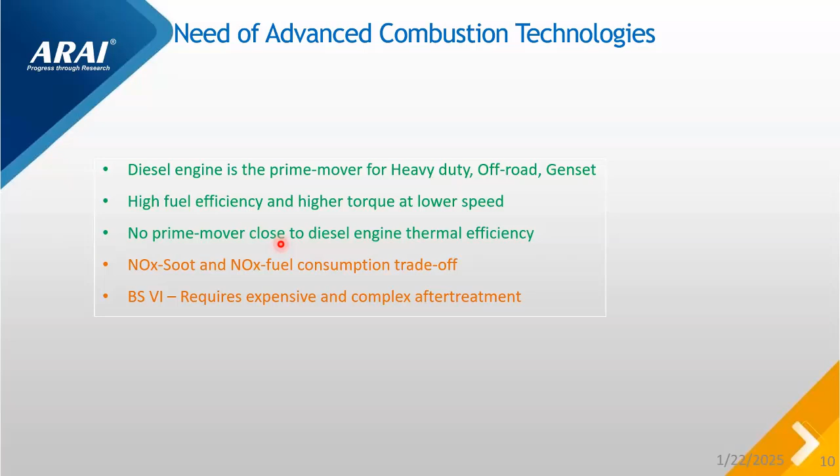This I will skip for the time being. We can also see here that there is a balance between global emissions and local emissions. As far as the present regulatory point of view, this is our main concern, but when we see the future generation sustainability point of view, this is the concern and worry.

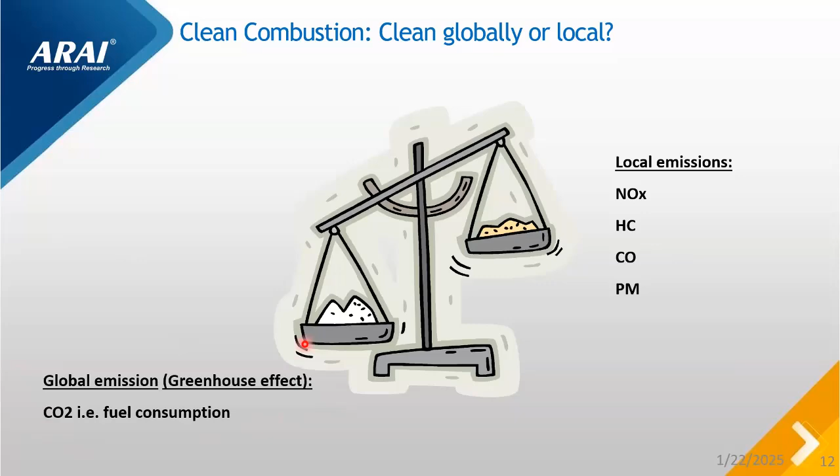That's why the Paris Agreement happened in 2016, and 194 countries signed on to that. Now the focus is shifting because this is already taken care of by many technologies. This area is not completely attended to or attempted by governments, research bodies, or advanced countries like USA. Today you've seen the news, they want to come out of Paris too, but that we will not discuss.

So we tried one of the concepts, the low temperature combustion concept here. We took one engine and modified it to see the possibilities of improving fuel efficiency by reducing the emissions.

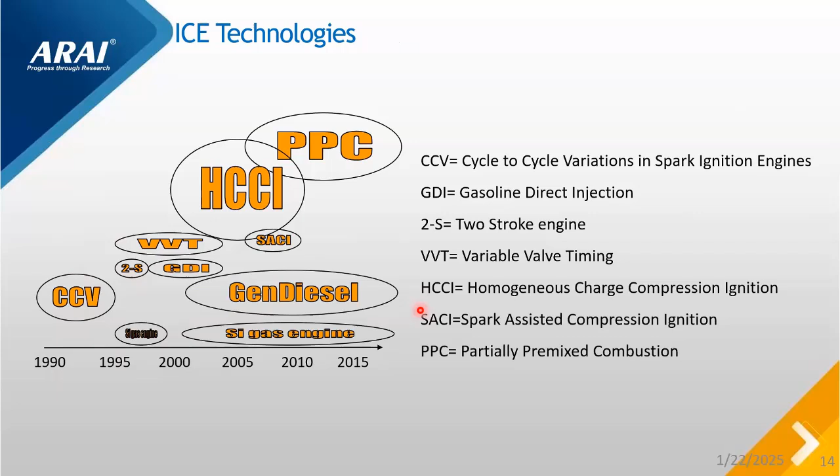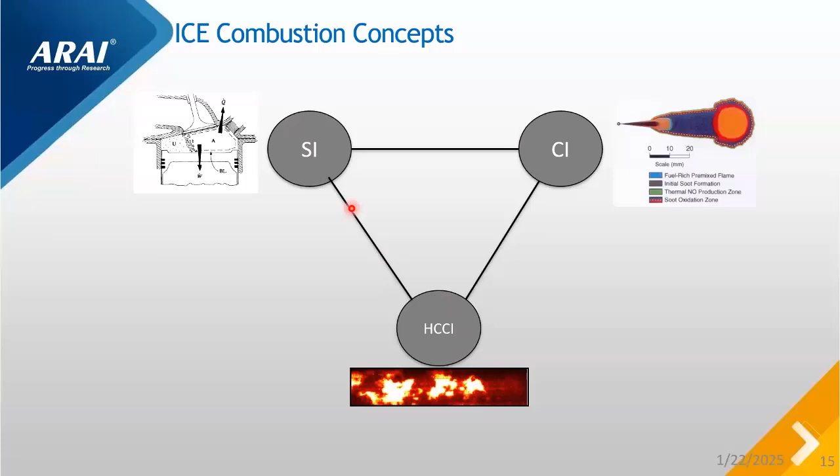If you look at the low temperature combustion concept, it is applicable to any type of engine, nothing related only to diesel. This concept is applicable to any engine, and it's applicable to alternative fuels like CNG. H2 is also useful. So there is a kind of balance between the SI engine, CI engine, and low temperature combustion or homogeneous combustion. This balance will help us reduce emissions at source and also improve fuel efficiency. I'm not going into the details because of time constraints.

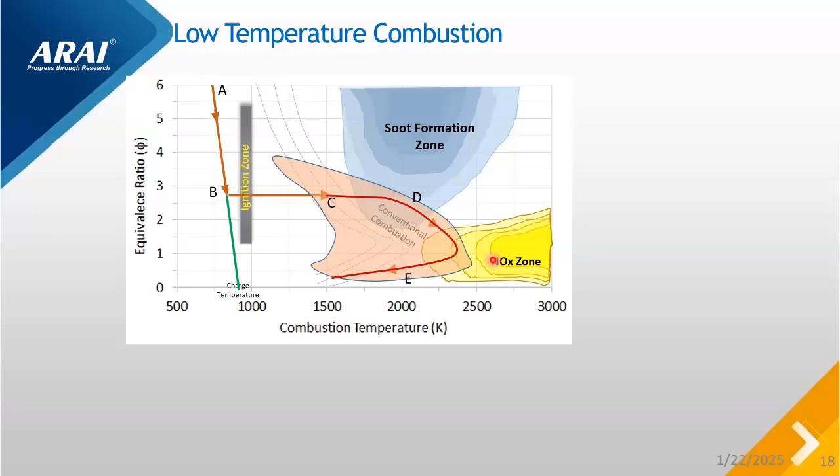So in the new technology we tried a couple of years before, we try to run the engine in this path, avoiding the formation of both soot and NOx, and then improving fuel efficiency. There is a good amount of work we have done, and I will show it here.

The concept here is that flame propagation, start of combustion, and duration of injection, everything needs to be tuned. As I said, diesel engines are not going to die, and we are working extensively on diesel engines, implementing this concept.

As a mechanical engineer or technical person, I cannot leave what I am doing, but at the same time I should add what is required for the future. This is how we are working here, and this has helped us in many programs and many projects.

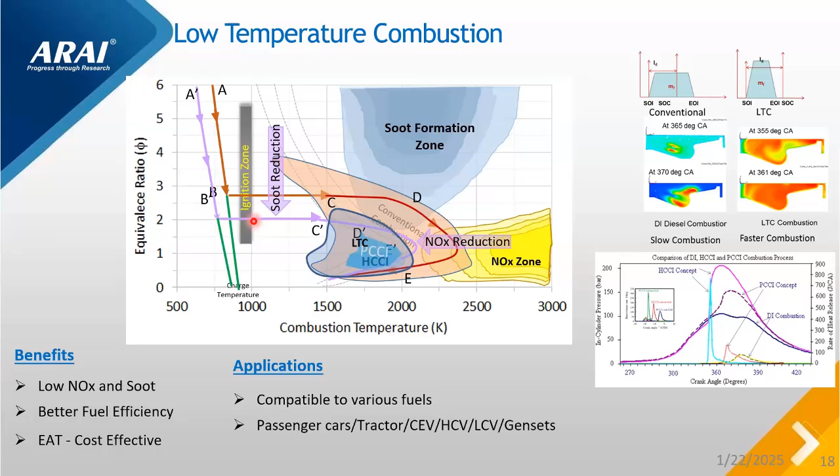So we got very low NOx, we got better fuel efficiency, and we got a cost-effective solution also. This is a practically implemented program I'm talking about here.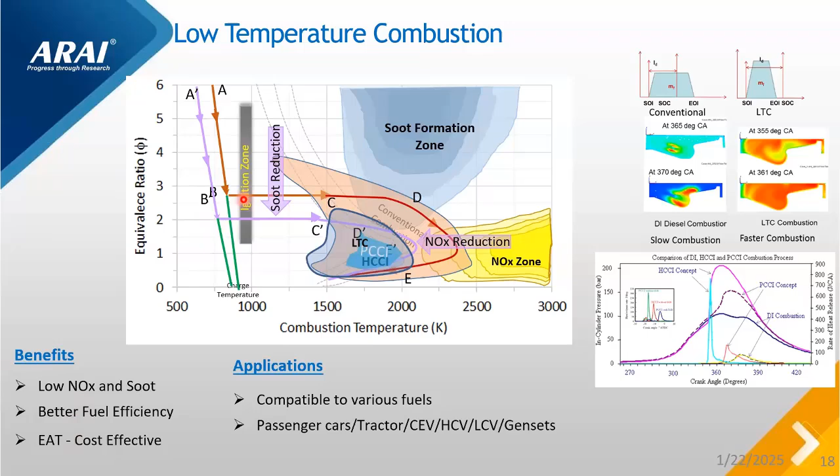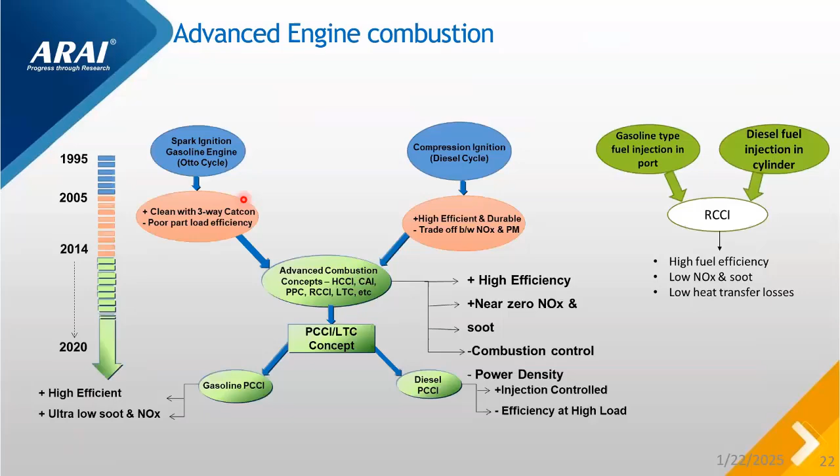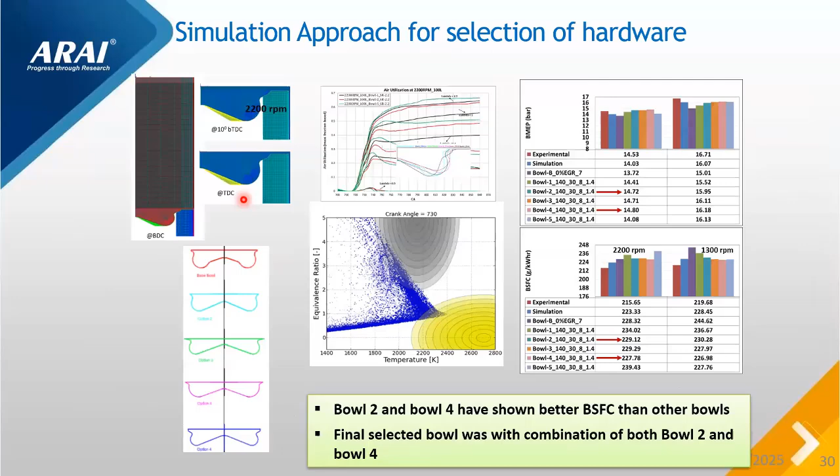I will not go through this difference, I will go to the results quickly.

After optimization, we identified the zone where we can run the engine with full low temperature combustion concept. Thereafter, we minimized the LTC concept and slowly moved towards the conventional DI, meaning we partially took the benefit of the new technology. While moving from zero load to full load, this transition happens slowly and gradually. So this is how we mapped the entire engine program first.

Then you can see the results here. How beautiful, you can see. Conventional is 6.71 NOx, the new concept is almost one third. And particulates also reduced by almost 50%.

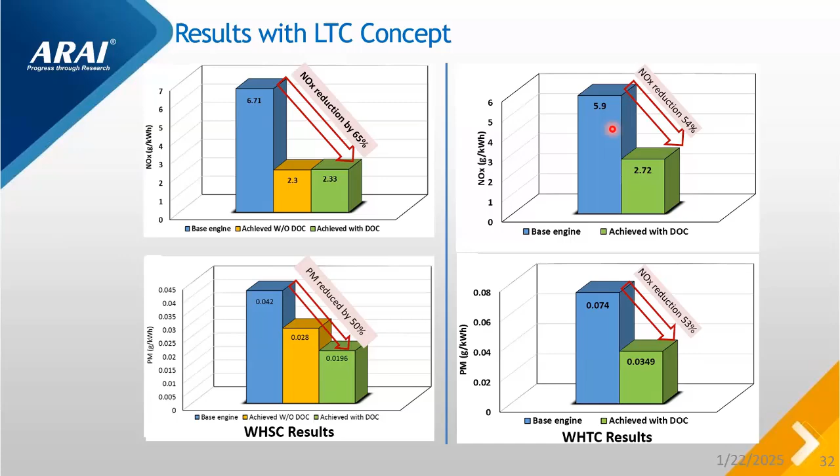This is how the new concepts are going to help us. But of course, facilities are also important, manpower is also important. As you can see here, fuel efficiency improved by 8%, just from the engine.

So you can see here the entire operating zone of the vehicle. When the vehicle is running in the field, this is how the engine operates, and at each operating point, this is the cumulative BSFC measured at different points, which is then converted into the cycle BSFC.

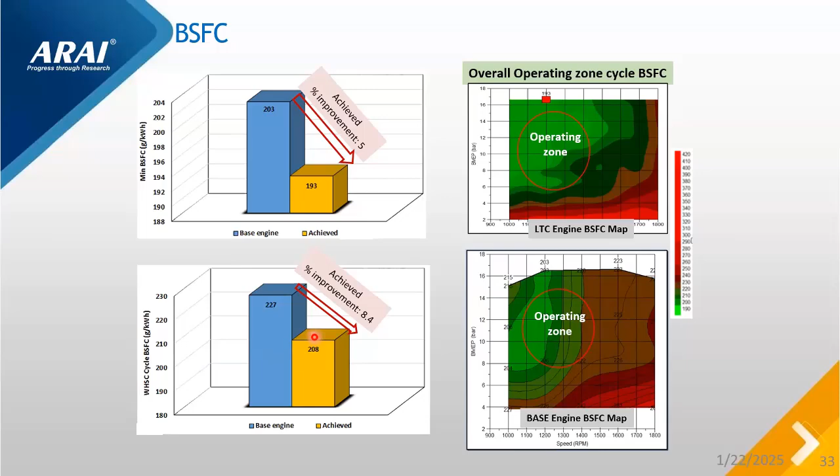This is one example I just brought to your notice to say that there are many open areas, many new areas available to improve fuel efficiency.

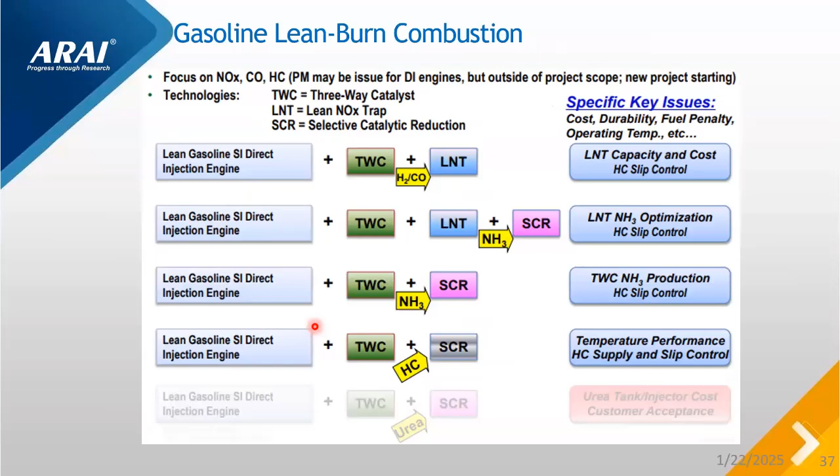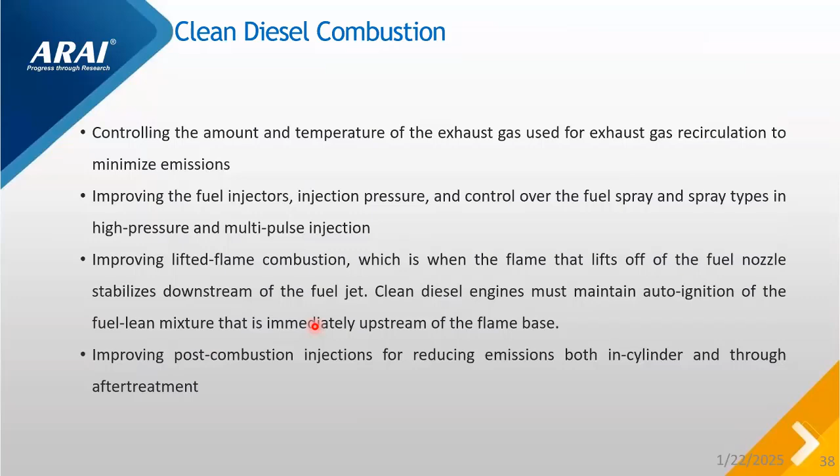Now I'm switching to another presentation where you can see the fuel efficiency improvement with different parameters, or parameter sensitivity on fuel efficiency. Give me one minute time, I will switch over to this one.

Because of confidentiality, I will not be able to show completely, but I just want to give some kind of energy or some kind of inputs from a research point of view.

What is the typical characteristic? At low speed... Excuse me sir, your voice is not audible. Is it audible now? Yes sir, yes, your voice is audible.

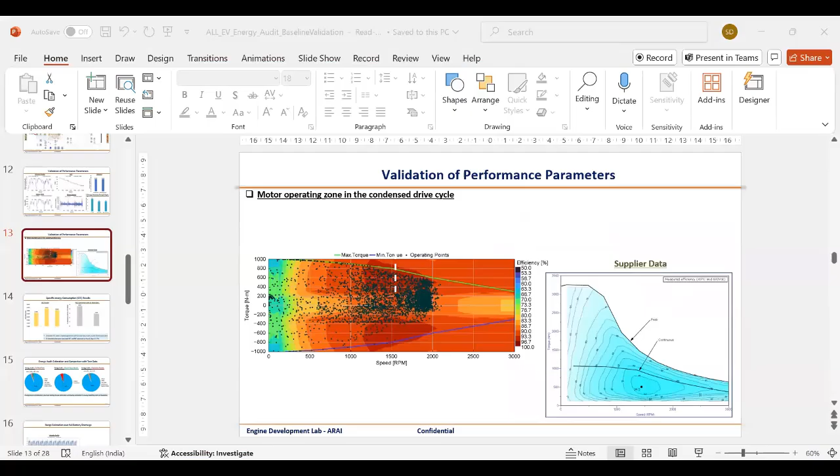Okay, it's like a typical characteristic motor will have. Initially it will have good torque, but at very low speed. As the speed improves, the torque suddenly drops in the motor. Also the efficiency map shows different efficiency at different speeds.

Then where should we run the vehicle? What should be the zone so that we can get the maximum efficiency, or maximum well-to-wheel or tank-to-wheel efficiency, battery-to-wheel in this case.

So now we can study the given motor characteristic curve. This is the characteristic curve where the points are mapped, showing whether it is in a good efficiency zone or in a bad efficiency zone.

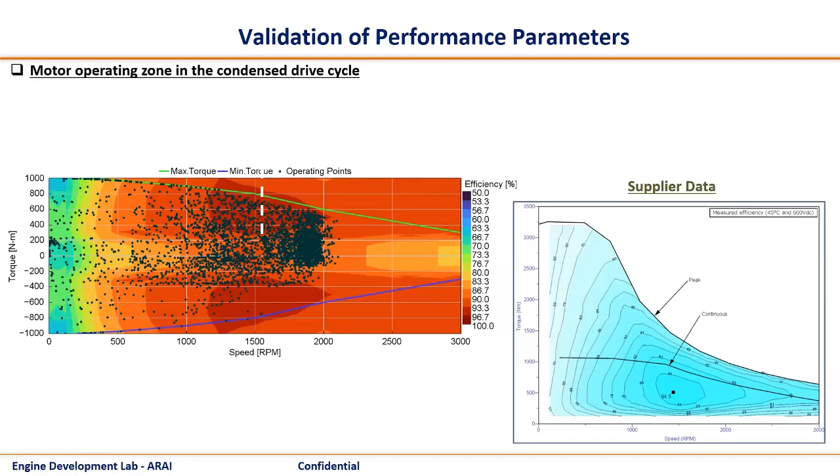This will help us give feedback, or help us understand what is exactly happening in the motor. If we can get this particular data accurately, I don't think it's possible purely from an academic point of view, but if we can tie up with some good university, either in India or outside, it is possible to study more in detail.

This particular concept will help us understand the specific energy consumption. What does specific energy consumption mean? How much kilowatt-hour is consumed for every kilometer, so that this will help us improve. This has to be improved.

Now, this is the value of the current vehicle on road. This is the value we targeted. This is the value we improved. I'm just giving a gist because I cannot go into much detail of this particular program due to confidentiality.

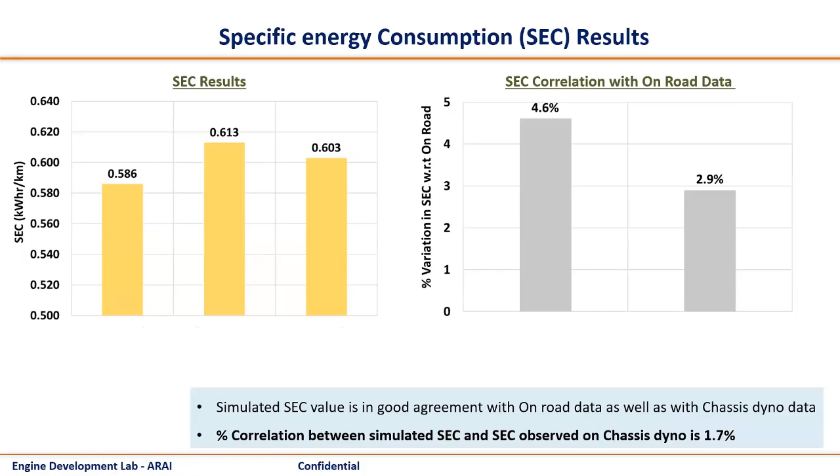So there is a lot of scope from a fuel efficiency improvement point of view. When I say fuel efficiency improvement, I'm not limiting to only IC engines, and not limiting to only vehicles. I'm expanding this requirement across platforms, starting from IC to fuel cell vehicles.

Okay, this is just an overall overview of my presentation. So I want to conclude over here.

Hope I have given some bullet points of future requirements and bullet points of what is happening in the current scenario across the globe to control CO2 emissions, and what government and industry are looking for.

Excuse me sir, your screen is not shared. No, no, your screen is not visible, sir.

Okay, what I am saying is that I'm concluding my presentation over here. So before concluding, I'm just giving a small gist about the presentation.

My main objective of today's presentation is that what exactly the world is looking for is not only technology, but also converting existing technology to efficient technology to reduce CO2 emissions.